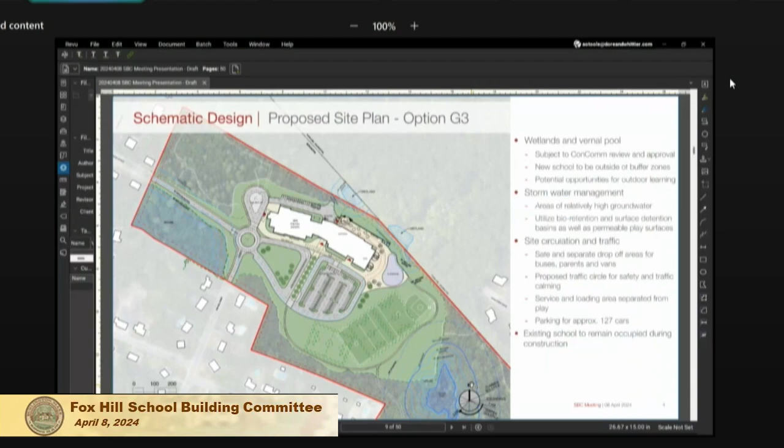So with this scheme, let me go forward—we've separated the pedestrian path, which would reuse pretty much the existing sidewalk. Folks would come up Fox Hill, cross the street, and travel around the traffic circle to enter the school.

The school orientation has not changed. The academic wing remains on the west side, so walkers would have direct access to classrooms.

The traffic circle remains as initially proposed. With this scheme, we have total separation of automobile parent drop-off, shown with the blue line, van drop-off in the fuchsia lines, and bus drop-off directly to the north of the traffic circle in a dedicated loop. This provides total separation of vehicles during drop-off and pickup, and also distributes the number of kids entering and exiting the school during that time.

This really works well for many reasons. One is that it also provides a wonderful front yard for the school. As you enter the site, what you'll see first is this green area that can be developed into areas for stormwater, potentially rain gardens and shallow bioretention basins. It also provides the ability to still maintain some fields, and we'll get into that in a second.

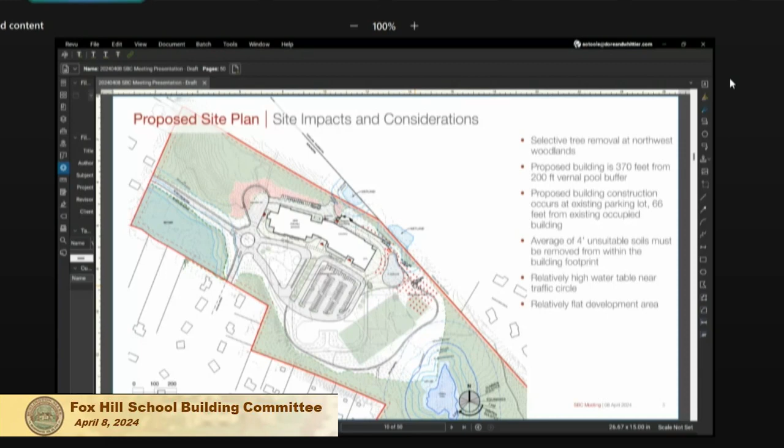When we last met, we talked a little bit about our meeting with the Parks and Rec Commission. Where we landed is the desire to create a multi-purpose field. In this case, it's sized to be a full-size lacrosse field, and we also would have the ability to create 3 U10 soccer fields that could be striped as well in this area.

At our last meeting, there was discussion of the fact that while we cannot fit a full-size softball field, there's a desire to accommodate a smaller field, maybe for kickball, which the school uses during recess. So we looked at where this could go, and it made sense to place a small kickball field in the northeast corner of the fields area. We would provide a fence around the backside, and this orientation would provide more protection for the wetlands in terms of balls rolling into those areas — so it's oriented away from the wetlands and away from the vernal pool.

So, are there any questions regarding the site before I keep going?

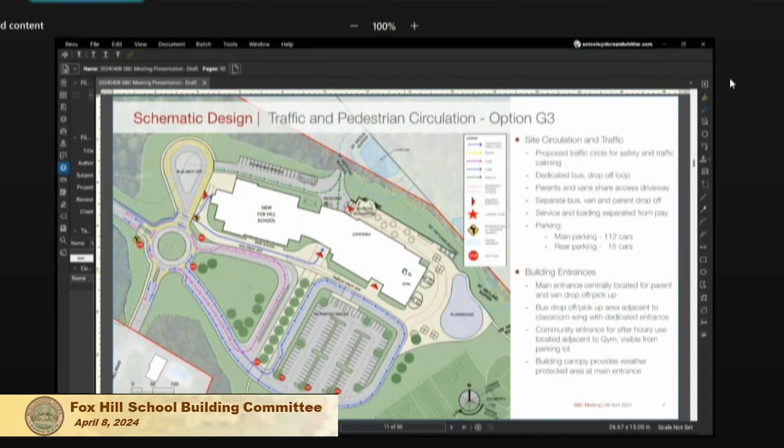We have also concurrently been looking at the building shape and some of the materials. Some of us visited the Shea Memorial Elementary School in Amesbury with the school, and the materials used there were really viewed favorably by the folks we had discussed building materials and massing with.

Using Amesbury as inspiration, some of the materials are durable, which is one of the goals, using durable materials that also have a natural feature to them. Most of the material at the Shea is brick. We often use brick for schools because of its durability, but it's also a very warm material with many different colors and different ways we can treat it.

Additionally, we have materials such as this lighter gray area, which is a fiber cement panel. It's not as durable as brick in terms of items running into it, so we use this material a little bit higher up. We also use aluminum panel, which used to be fairly inexpensive but now seems to be one of the more expensive materials, so we use it more sparingly to provide accents to the building.

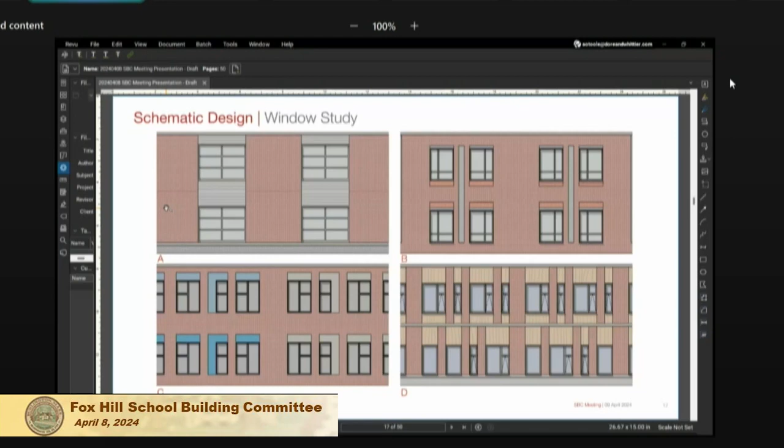So the windows are designed so they cannot open more than 4 inches. We would definitely look at where those windows would open on the first floor, particularly if they're next to walkways - you don't want anybody. We've had a school where the principal was particularly concerned about windows next to a play area and kids running into them. So we're very careful about deciding which windows are actually operable. In this case, we often like to make the smaller windows operable because the larger they are, the smaller amount of open area you really get. Does that help? That does, thank you.

Okay, all right, keep going then. So these windows were actually inspired by projects that we've already completed.

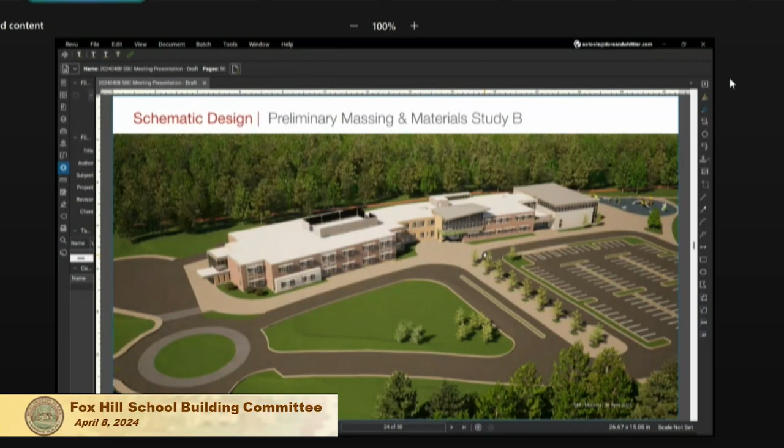Thank you. Yep. All right.

Here are some very preliminary views. We're looking at the sunshades—I keep mixing those up, sunshades, right, Neil? Sunshades that are installed over the south-facing windows, and the orientation of our classrooms works perfectly for that because they face due south.

All right, and another view. This would be the entrance right off of the bus drop-off, and what we want to do is develop this really nice, open, welcoming vestibule and entry area, since that's one of the first things you see as you drive up to the school. We will have areas where you'll see mostly brick.

This is a factor of these being classrooms—we have, on opposite walls, either a teaching wall with whiteboards, or a storage wall with sliding marker boards. So when we have these larger swaths of wall, we treat them with either a mix of brick color, or corbelling or recessing brick to give it some visual relief. Brick is such a beautiful material—there's so many things we can do with it.

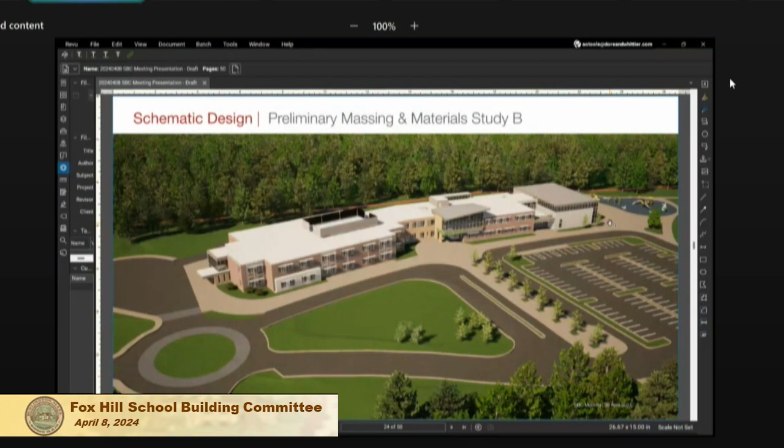These play structures can also incorporate roofs and some shade structures, so we'd be looking at providing shade in some areas, and underneath some of the platforms and ramps the kids could also find shade. But around the playground, the hard surface—this beige area—is going to be painted asphalt.

We'd paint lines for foursquare, hopscotch, different games the kids might enjoy—they might come up with ideas if teachers work with them to have fun with the playground. We've often been asked in more recent projects to provide some sort of shade structure, and that can definitely be incorporated somewhere along this hard play surface area as well.

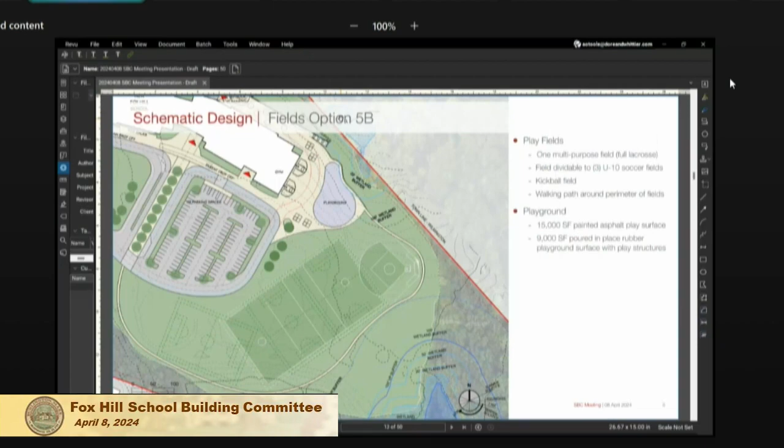So very, very early design, but we welcome any comments or suggestions that we can look into and actually scope out.

I just wonder, with the woods right next to the school at that spot, is there a way to incorporate more nature play? Yes.

I think at our last presentation we can definitely pull this together again for the next presentation. When we met with the science curriculum folks, we looked at different themes and different ways we can pull nature into the play structure area as well—so definitely, that was one of the themes.

All right, I'm gonna keep going. I'm sorry, this is so long. All right, it's just that we've been really working away.

Again, the floor plans are pretty much set. We have not made any changes in terms of how spaces relate to each other or where they're located. We have been refining—we've refined the admin area.

We're refining the music suite. We're also looking at refining the second floor, which would become the STEAM rooms—science, technology, engineering—designed in conjunction with the media center, and then the art room next to it would create a really great gallery space. On the second floor we would also have an outdoor rooftop learning space.

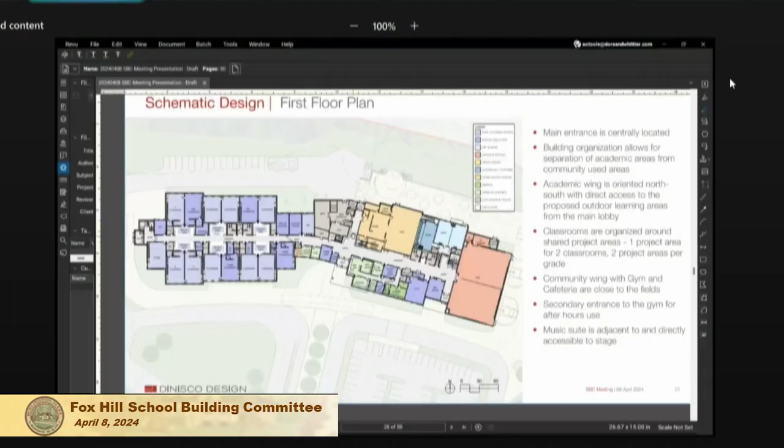The library media center is one of the only spaces we usually provide carpet for. We'll be talking about finishes in upcoming meetings. We want them to be durable, so we don't want Bob's team to have to replace things very often, but we also want to design a space that's warm and welcoming for the kids.

We know kids like to sit on the floor, so in the library it really does make sense. We design libraries so there are different areas of teaching and learning - some classroom areas, open space for kids to transition between lesson time and checkout time, and also areas for storytelling. We'll be working with the librarian and the school to refine these spaces.

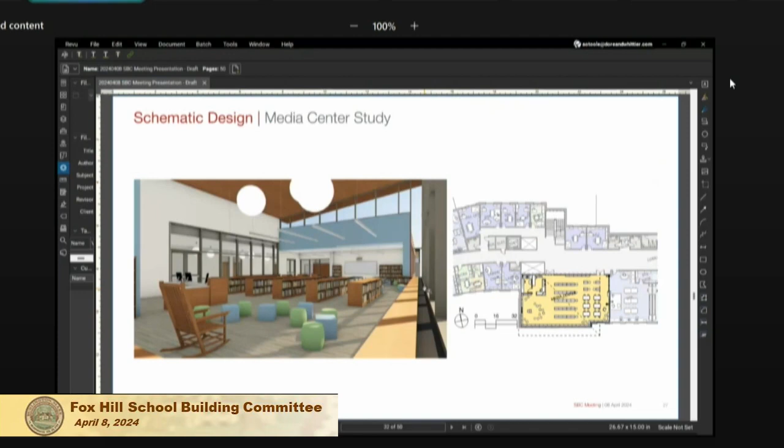We also started looking at the project areas and how those could be organized. One way is to provide some openings within the components that divide the project areas. Our project areas are organized so there are two classrooms per project area, but the grades are really sharing two project areas. So you want to provide some connectivity, but also space so small groups can work independently without bothering each other.

There's definitely a balance, because you want to be able to collaborate with teachers across the hallway in the same grade. But you really hit the nail - you want to provide a space where teachers can see over, but the kids may not be able to. At Maria Hastings it's organized so teachers standing on one side cannot see down low, but can see their colleagues across the hallway. It's a different way of treating the project areas. Our project areas at Fox Hill are actually smaller than these, so they'll be more intimate - these are typically three classrooms per project area, so we'll definitely be looking at that, Martha.

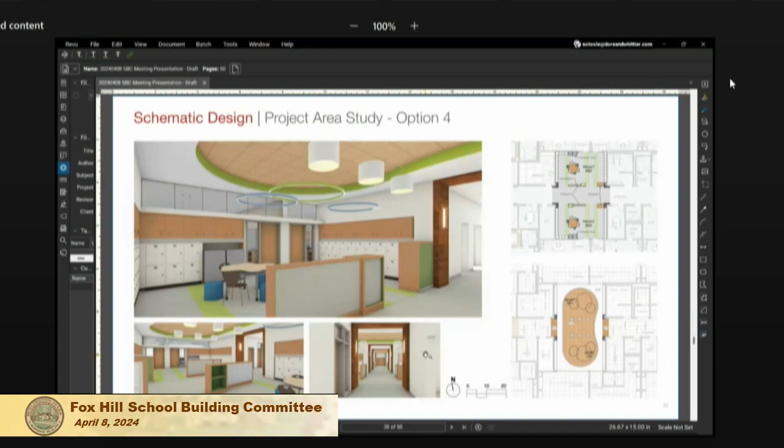All right, any questions on the interiors? No? All right, okay, so we had a great meeting with the planning board last week.

We went through some of the permitting requirements, and this is what we're looking at at this point. Article 4 of the zoning is based on use regulations, and the first item has to do with the solar canopies. The fact is that the parking lot is considered a side yard, so it's very likely this is going to be acceptable with a special permit. It still requires a special permit from the planning board.

The item regarding the emergency generator is a use regulation, and they cannot grant a special permit for that—it's just a use that's not allowed in the residential zone where the school is located. So that requires a little further discussion. There's been talk of potentially changing the zoning language to provide exceptions for school uses in residential zones, but we'll continue that conversation as we move into the next phase of design. For now, we're going to carry a generator and the gas for the generator as part of the schematic design so we know it's in the budget.